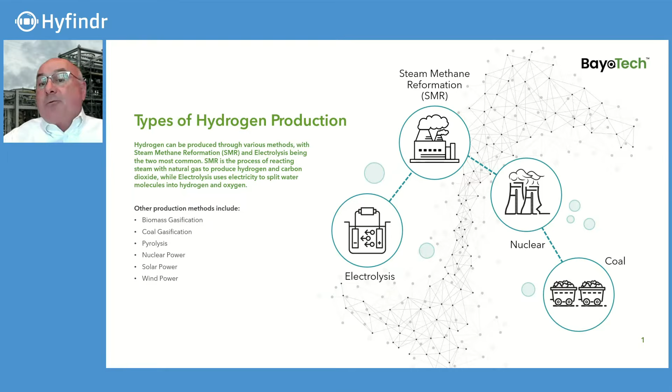Making hydrogen per se from nuclear, it's not necessarily a byproduct you want to try to extract from the nuclear reactions themselves. You're using the reactions to create heat or electricity. Okay, all right, understood.

So the two main hydrogen production routes that people talk about are steam methane reforming and electrolysis. And again, steam methane reforming is a process that runs on heat. Electrolysis is a process that runs on electricity, so current. Now, steam methane reforming dominates the hydrogen manufacturing landscape around the world. Over 95% of the production of hydrogen comes from steam methane reforming.

Electrolysis hasn't really been deeply industrialized and commercialized for hydrogen making. It's used for many other molecules, but for hydrogen making, it's still just now emerging from the research phase into a development phase for what's the optimum configuration and minimum amount of energy. So it has a very small fraction of the manufacturing market right now.

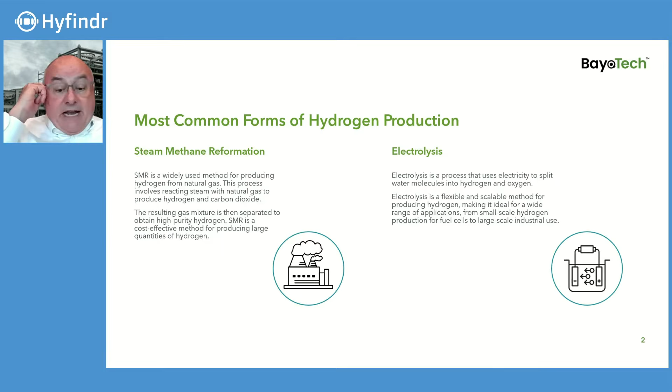Well, yeah, understood. Clearly, electrolysis, if you look at the current discussions, is in a lot of people's mouths, which is great. But considering the fact that there's this large part of the market still running on steam methane reforming, I think this is a good opportunity to look into this, and I think this is also where you have some expertise to share and some products that you're offering.

Yes, and the SMR is very interesting. Maybe I'll turn to the process and talk about what steam methane reforming is. So it's literally what it says, but it's actually a little bit more than people think. It's actually a two-step process. There are two chemical reactions. So if you let me get my pointer out.

Oh my. Hang on. No worries, no worries. So, Greg, we know you're an expert in chemistry. You've basically gone the whole way. You do not need to qualify in the same manner with software for presentations, but you're doing a great job. I wanted to get a pointer. Pointer, okay, but okay, it's fine. You can just use the mouse. Okay. I should have done that in the beginning.

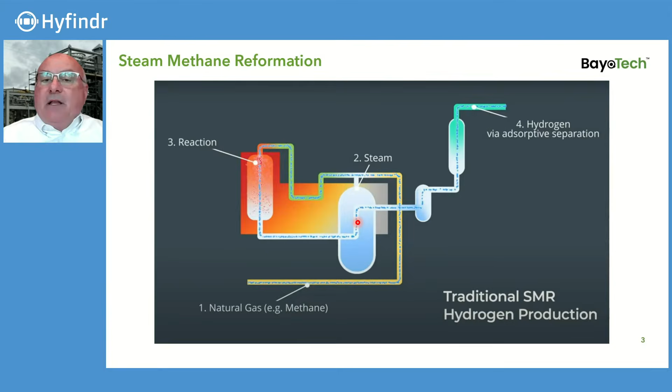And my discussion today is going to lead us to a discussion about mobility. So that's the way the reactions are generally run. The way BayoTech is doing it is in what's called distributed steam methane reforming. As I said, the traditional factories are very large, usually situated right next to, for example, an ammonia making plant. And through the pipeline, the hydrogen goes across the fence and goes into that reaction.

Our mission is to make hydrogen on a much, much smaller scale and make it located in more places, because the hydrogen mobility market is not going to be in just a very few places. In the US, it will be widely distributed. So as a result, we had to create a reactor that was very efficient, because it's not got the opportunity to take advantage of scale. Chemical reactions can generally be made more cost effective the bigger you make them. So we've done something that's contrary. We're making the units smaller. And how do we do that?

We're doing that with this concept called a bayonet reactor. If you go back to that schematic in your mind, the methane and the steam come into the reactor. They get into a very hot place, a furnace fired, in our case, by natural gas, which creates the reaction to make syngas. And then as the gases are exiting, this is a pipe inside of a pipe. The gases on the inside give up their high temperature heat to the incoming colder gases to warm them up. And thereby, we're conserving energy.

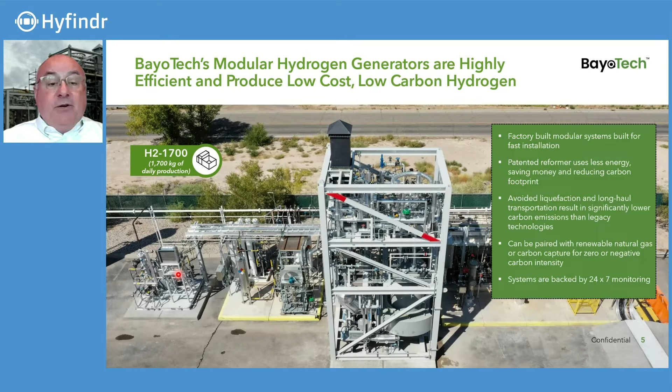So you see that big metal framework that came in on a truck on its side, and we tipped it up and put it in place. I was wondering when I saw that first. That looked like a 40-foot container, basically. It is, exactly right. That fits on a big flatbed truck, and the modules in the full scale plant have all the other ancillary equipment in a framework like the main reactor. So there's actually 3 truck-based modules that come in on their sides, and we stand them up. Okay, Greg, please.

So I'm a little bit conscious of time, and we wanted to get to the carbon intensity part. So maybe you can quickly segue to that, because we're really curious to understand that part, which you've mentioned now. Yeah. Okay, good. Well, so just a couple more comments on the centralized hydrogen.

Because the plants are so big and they have a large investment, any customers that are far away have to get their hydrogen by liquefaction at the factory and then transport by truck. Some of these transportation routes are 1,000 miles. So that's the centralized production model with big factories. And this is what I just said. If you're lucky, you have a pipeline. If you don't have a pipeline, I think it's important to note that it's $1 to $3 a kilogram to make the hydrogen, but for high volume liquefied shipping could be as much as $14 of shipping cost.

So this is the lead in to carbon intensity, and why it's important to mind not just the carbon intensity of the process, but the carbon intensity of the delivered product. That's a very important point. And low volume sales, with liquefaction, are paying maybe as much as $20 a kilogram.

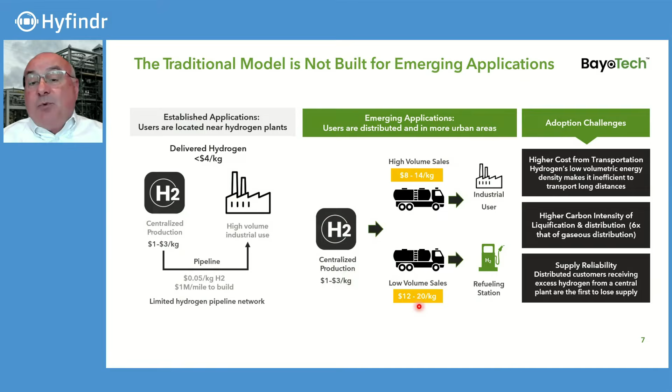Our model is to build a lot of these littler hubs so that our production and our usage are very close by. We'll have a radius of delivery that's relatively small compared to the big centralized industrial plants. And now the notion of carbon intensity centers a lot around shipping as well as manufacturing. So I'm just going to skip through this.

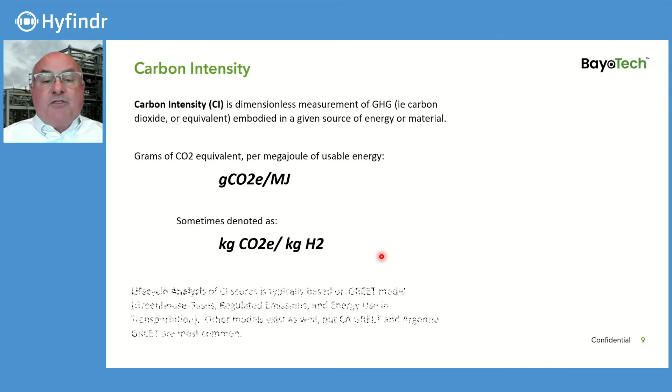And so there's carbon expended in every one of these steps. And people tend to think that just the production is the most important part. It is an important part, but it doesn't necessarily dominate the landscape, especially with long distance transportation.

Now, the carbon intensity is measured two different ways. One as grams of CO2e, that E means equivalent, for each megajoule of energy that you created, not energy that you used, but energy that you created. And this is the energy-based definition of carbon intensity.

And then there's a mass-based definition of carbon intensity, which is kilograms of CO2 generated for each kilogram of hydrogen generated. And you can translate between those two things because a kilogram of hydrogen is 33.5 thousand BTUs. Yeah. So I'm an engineer. We use English units. It's 33.5 kilowatt hours. Yeah. It's like the same thing. Same. So there's the definition of carbon intensity.

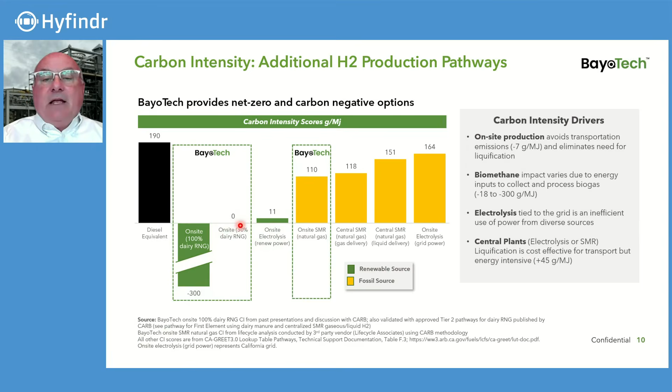Okay. So if you allow me to chip in there, as a matter of fact, if you travel to certain areas in Europe, you have quite a number of these farms where they actually catch the methane and use that for generating electricity, running engines on that. So that would be the same kind of source you're talking about. It's essentially big containers with domes on them, and they pipe off the gas at the top.

Yes. Now, there's a couple of ways to go at it, Stephen. One is you can actually use the gas, which has to be cleaned up a good bit because it has other things in it. It's not just pure methane. But in the United States, and probably in Europe too, there is a trading system for buying and selling credits for use of RNG that gets tagged with the RNG credit for carbon. So right now, instead of building our sites where farms are, we're going to buy credits for that renewable natural gas, and there's a price to pay for that, but it gives us this terrific performance on carbon.

Okay, Greg, we've gone a bit far on our time, but this was because it's that interesting. I think it's a pretty strong statement that you can turn carbon negative using steam methane reforming. That's what I have learned here. Yeah. We can do that, and BayoTech is on track to go from where we are right now, which is 110, and we're on our journey to zero. Well, I would say that is news. So this is something more to talk about. Thank you for taking us through your reactor to the dairy farm and somewhere near zero or even below zero. I think that was extremely interesting.